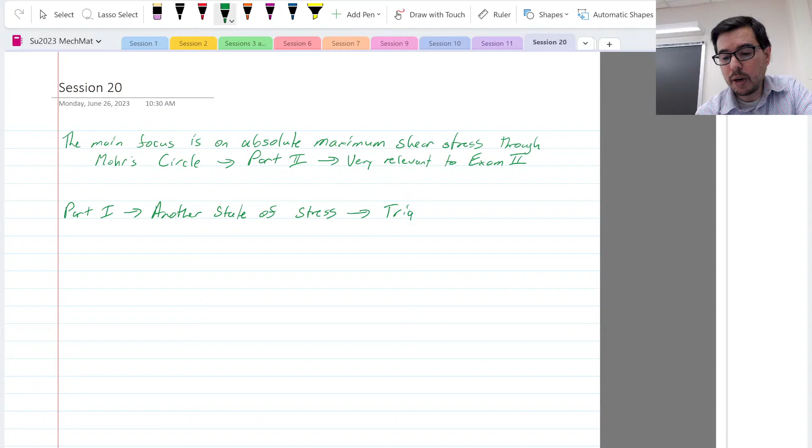But before we get there, I thought it would be interesting to talk a little bit about another state of stress, which is part 1 of this session, and that's called triaxial stress. And the basic idea is that you can have some 3D element, and I can put some stresses on it. Oops. Something like that. And maybe the state of stress looks something like this in terms of a tensor.

Okay, so this is like a general state of stress in 3D, which is not something that we typically focus on studying in this class. But if we have this general state of stress, we can rotate or change orientation such that we find only principal stresses in all three new dimensions, okay? In the new x prime, y prime, z prime, essentially. And we have sigma 1, sigma 2, sigma 3, so all these other terms would be zeros. So there's no shear stress.

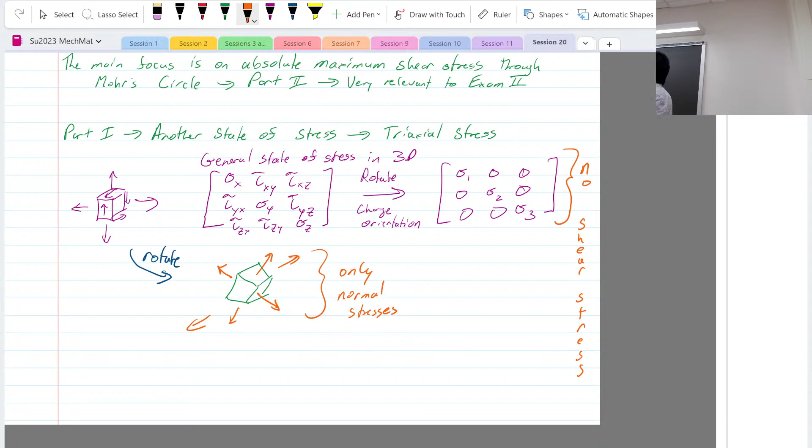Yes? So there's two angles, right, that it's rotating? Yes. So does that mean there's 4 different combinations of the two angles that can control? Yeah, you can get there different ways, yes. I've had to think a little more carefully about this. There's a phrase that says finite rotations do not commute. This is from Professor Baruch in our department in his book on analytical dynamics. So they're not commutative, right?

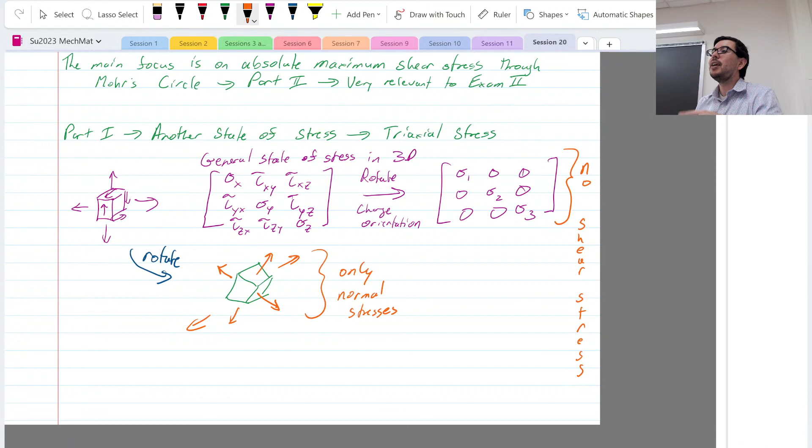So you think, right, we have operations like addition, multiplication. It doesn't matter which one you do first. In this case, it gets a little bit tricky with the rotation. So if you say, I'm going to do a plus 30 degree rotation about this axis and then a minus 30 degree rotation about this axis, if you do the minus 30 before the plus 30, you're not going to get to the same orientation. Okay. Again, beyond the scope. I like the questions. Beyond the scope, right?

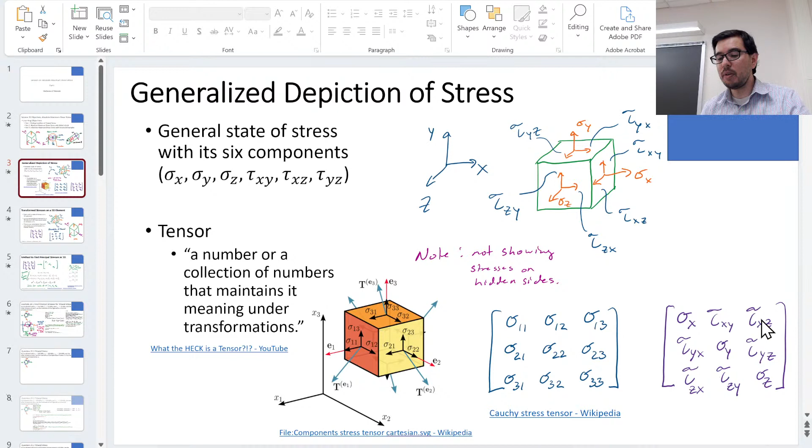So in the notes, what you'll see is that we are attempting to go from some generalized depiction of stress, like you see here, or you see here, right? Because the Cauchy stress tensor is given by just sigmas, but we can also write them out as sigmas and taus. Okay, so we go from that state of stress to some orientation of what's called triaxial stress. So this is a state of triaxial stress when you have only normal principal stresses in 3D.

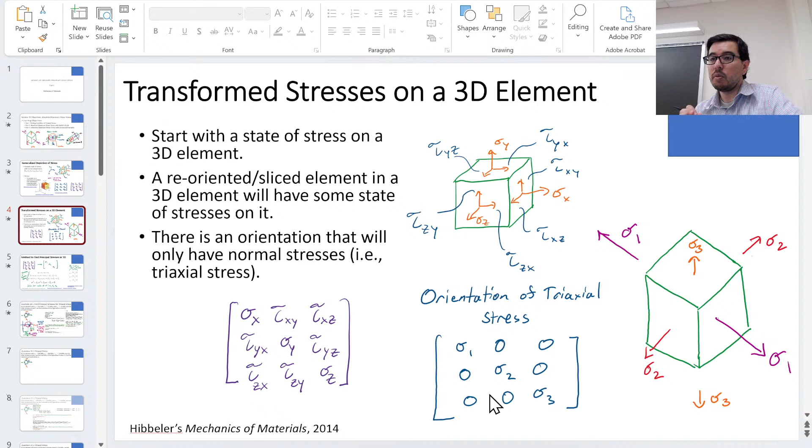Okay? And one method of finding these principal stresses is to set up these invariants, I1, I2, I3, and then solve for the roots sigma 1, sigma 2, sigma 3, as you see here. And this will give you sigma 1, sigma 2, sigma 3. So this is a third order polynomial, and there will be 3 roots that solve this equation with these invariants. If you want to solve it, I highly suggest that you just use the code that I'm giving you, all right?

Now, if we're interested in calculating the maximum in-plane shear stresses, we can do so using sigma 1, sigma 2, sigma 3. So first, what you would have to do is figure out what sigma 1, sigma 2, and sigma 3 are. In other words, we're figuring out what are the principal stresses in 3D.

And similar to what we've done previously, we can use Mohr's circle, or use our understanding, and figure out then what the maximum in-plane shear stresses would be, let's say in the 1-3 plane, in the 2-1 plane, and the 3-2 plane. Again, this is a little bit beyond what you would be expected to do for exam 2, mostly because, compared to what we've been doing, this is a little bit more computationally intensive, numerically intensive.

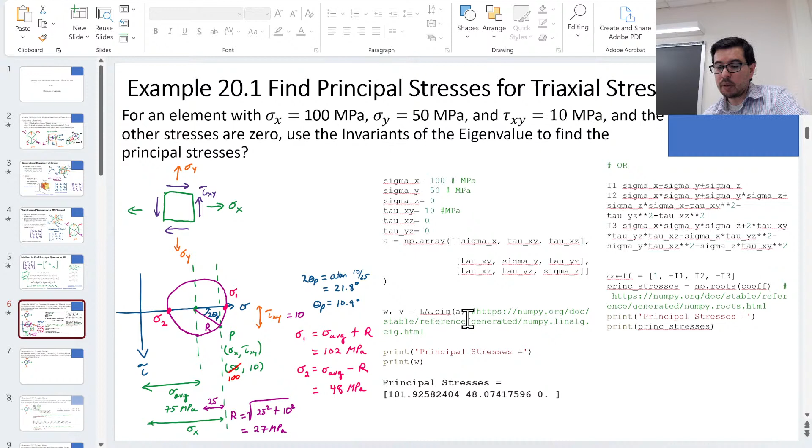Now, another way to do this is to use the eigenvalue solver, which is in here. So, well, actually, this is using the eigenvalue solver, and then this is using the roots technique. Here's what you see: roots, and you see eigenvalues, right? Either way, it will solve the problem for you.

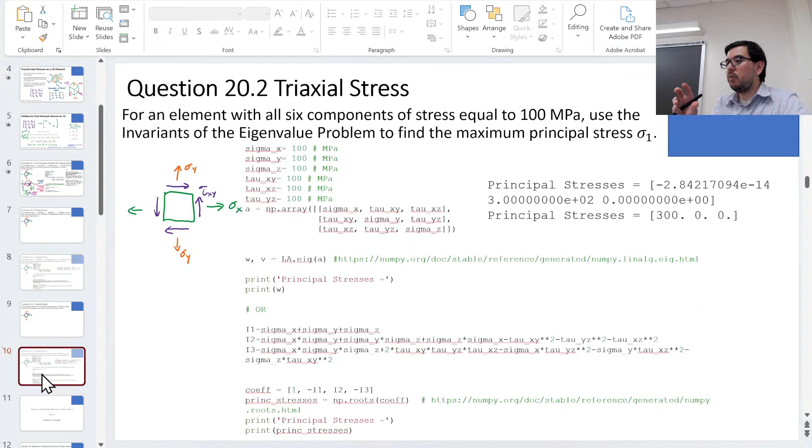Now, this is not going to be on the exam, but I think it's interesting intellectually to be able to understand what we can get if we orient the element differently in 3D. What will definitely be on exam 2 is this section on absolute maximum shear stress. So we just discussed that if you want to take your calculator and have it spit out sigma 1, sigma 2, sigma 3, and then use these in maximum in-plane shear stress formulas, you could do that, all right? What we're going to show, though, is a graphical method.

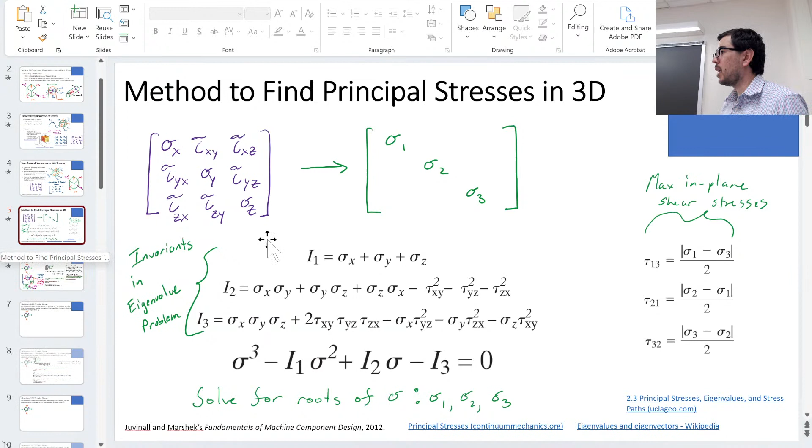This is not really a graphical method. Where is it? Right, this is not really a graphical method. This is a mathematical method that spits out an answer. Absolute maximum shear stresses can be calculated without too much difficulty for our kind of 2.5D problems that we've been doing up to this point.

And why do we want to know what the absolute maximum shear stress is? Any ideas? Based on what we just said about why we want to know maximum normal stresses, why would we want to know absolute maximum shear stress? To see where the material will fail. Right. And what kind of material are we talking about? Not brittle, but the ductile materials, right? And again, it's a little bit unfair because we haven't really gone through failure criteria yet. But your steels, your aluminums, these ductile materials, these are the ones that fail because of shear.

And so we were saying before, oh, I can figure out what the maximum in-plane shear stress is, and that could be important to determining why a material fails. But it turns out, even with a 2.5D problem, the largest shear stress may not be in the plane that we've been discussing. And so that means that we would like to figure it out, because we care about failure, and we will care about failure more in the future.

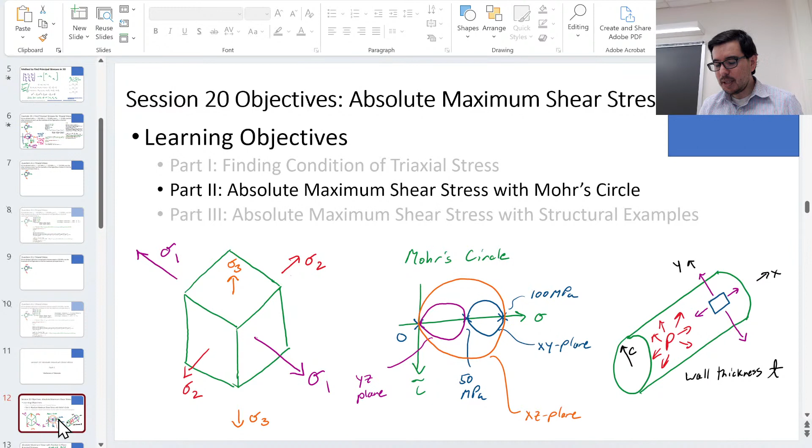So you can go through the video. There are 2 cases that are important that you want to think about. And those cases are where you have principal stresses that are both positive. All right, so the video does a better job than I can do right now. But what you'll see here is you start with a positive state, right? So sigma 1, sigma 2 are in tension.

I guess maybe we should back up and say, look, what we've done is we've found the principal stresses in 2D, in a plane, right? So that means that if I gave you a sigma x, a sigma y, and a tau xy, that's what plane stress is for us. So 3 parameters, sigma x, sigma y, tau xy. You make your Mohr circle, and I highly suggest you be able to do this. I give you sigma x, sigma y, tau xy, you make your Mohr circle, and then you figure out what sigma 1 and sigma 2 are.

If sigma 1 and sigma 2 are both positive, in other words, this state where they're both coming out of the element, two tensile stresses, two normal tensile stresses, then let's say that's this Mohr circle right here. All right, so maybe I will go ahead and do this. I don't think I can outdo myself, but let's point this out. So we start with a sigma x, sigma y, tau xy.

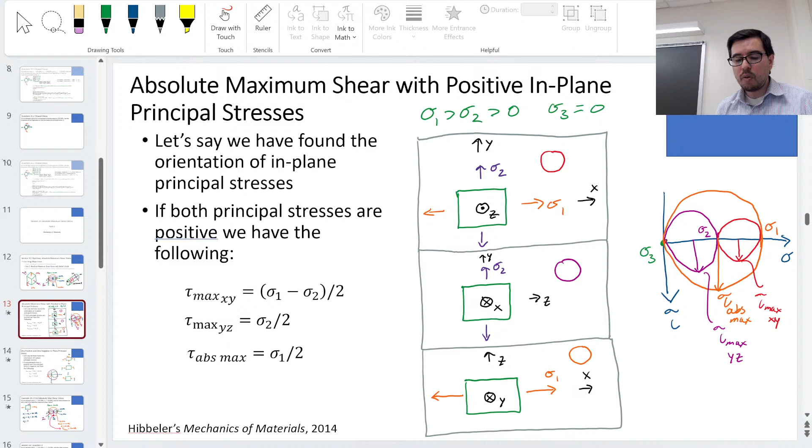But what we're saying is there exists another plane, this xz plane, where we have a larger shear stress, a larger radius of the Mohr circle. And so this one we can designate as the absolute maximum shear stress. And for a particular criterion, a ductile material could fail because of this absolute maximum shear stress.

Okay, question, yes? Isn't that always gonna make a square from the edge of the circle? I'm sorry, what do you mean by a square? Like it's from sigma 3 to the center, which is the radius, and then from the center down to the other edge, which is the radius.

Okay, yeah. So we would have a sigma 1,3 average, just like we've done with other Mohr circles. The middle of this is sigma 1,3 average. And yes, R is going to be from the sigma 1,3 average to sigma 3, to the absolute max, to sigma 1.

Okay, now, there's the other case. This was the case where both sigma 1 and sigma 2 are greater than 0. There's another case where you get a sigma 1 and a sigma 2 and they're not both greater than 0. In this case, for example, sigma 2 is less than 0.

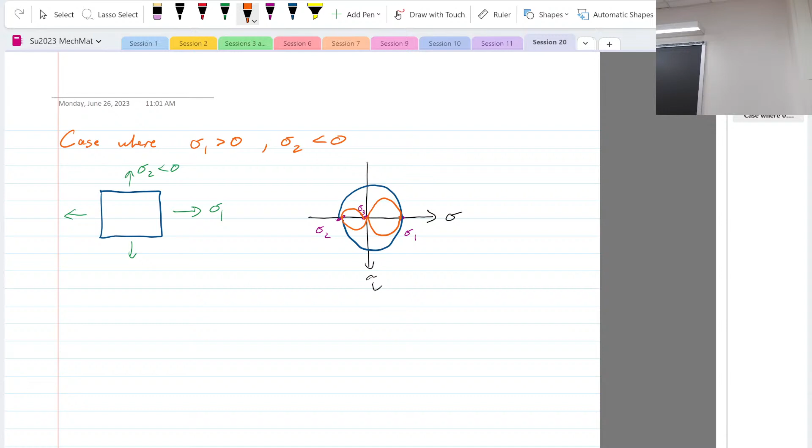George, which one of these is going to give us the maximum shear stress? The biggest one. All right, 2 for 2. The biggest one is the one that gives us the maximum. So in this case, when sigma 1 is greater than 0 and sigma 2 is less than 0, what we had as the maximum in-plane shear stress is actually the same as the absolute maximum shear stress.

So in this case, the in-plane, and we're talking about the 1-2 plane, max shear stress is the same as the absolute maximum shear stress. Okay.

So that's the whole thing. So what do you get to do? You get to take what we've done with our Mohr circles in the past and add a sigma 3 at the origin, draw 2 more circles, and then figure out which is the biggest.

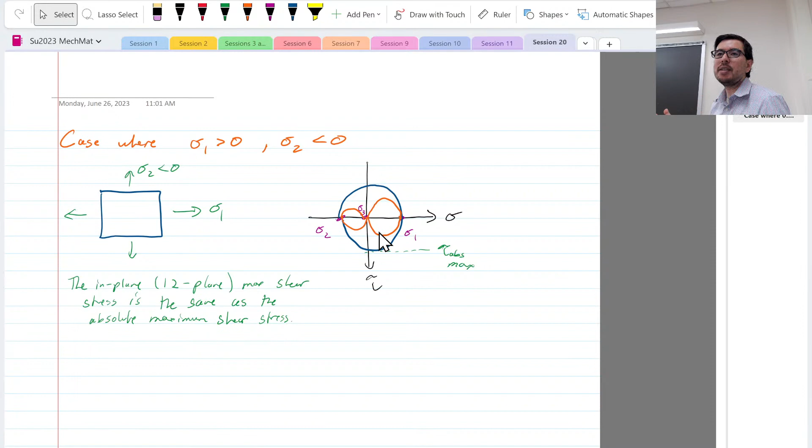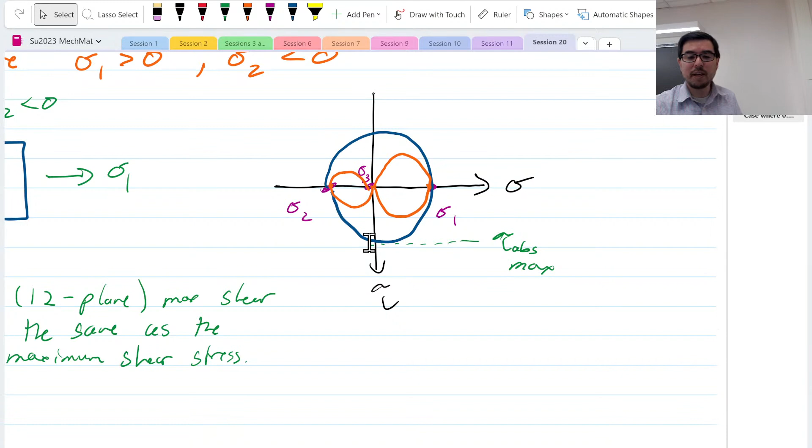Yes? Is the right circle supposed to be bigger? Yes, it is. Because I drew sigma 1, I tried to make sigma 1, like this diameter is slightly bigger than the sigma 2, sigma 3. And how is the radius? Why is that though? That's because I picked. That's what I picked. You could have sigma 1 less.

So I could take the absolute value of sigma 2, and if the absolute value of sigma 2 is greater than sigma 1, right? This is just arbitrary. Oh, so, okay, I could have easily written it like this. Could they be the same if sigma 1 and sigma 2, their magnitudes were just equal? Yeah, yeah.

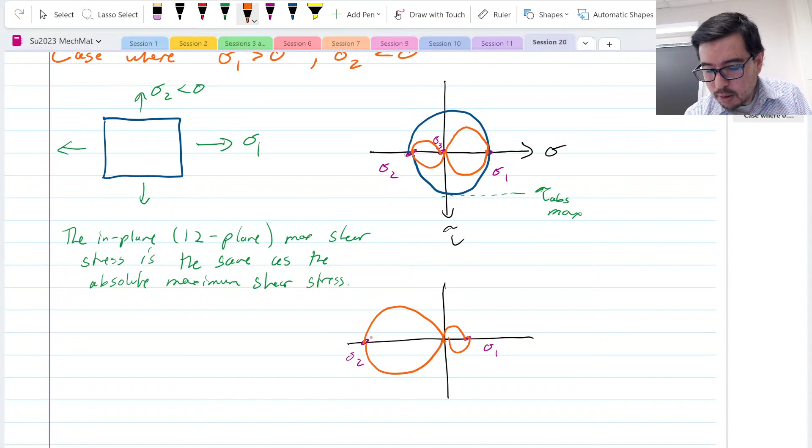Right, and what would be cool about that if they're equal? This is a good point, Owen. So this again, I draw my Mohr circles, right? Little bitty one, and the big one is the dominant one. But what happens? That's almost worth another page. What happens when sigma 1 is equal to minus sigma 2?

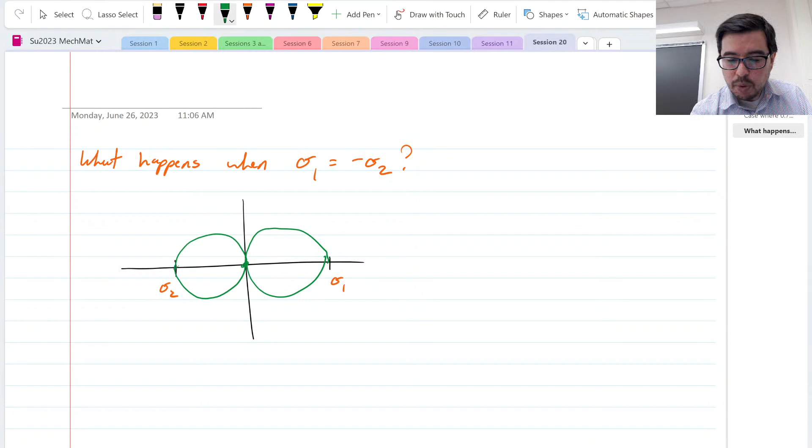In that particular scenario, we'll call this one sigma 1. I'm trying to make it somewhat symmetric. Look, this sigma 3 is again at the middle. I didn't quite do perfect, okay? But we can say that the sigma 1, 2 average is at the origin. So we'll say this is at the origin or equal to sigma 3, or we'll say this is the sigma 1, 2 average right in there.

What is cool about this? Something very cool. This is in a state of pure shear, right? We have a state of pure shear because when we get to here and here, the tau absolute max, there's no normal stresses. At this state, pure shear without normal stresses. Okay, and that's an important case.

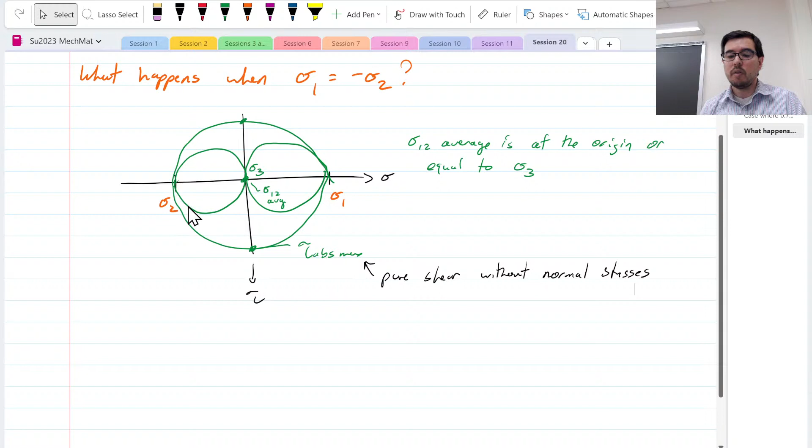So we can think of this, if you want, as a rod or a shaft being twisted. That would be equivalent to that, and we could figure out what the principal stresses are, where sigma 1 is positive and sigma 2 is negative. Right. So in the state of pure shear, if we said we had a

T, okay, and I took an element here on the surface, so this is a little bit hard to see. Let me draw the T a little bit differently. I think that's more clear, right? We're as clear as mud. Okay, and then I've got that element.

So the way I draw these, this is on the top surface. I say, okay, this is twisting this way. Then I visualize the deformation, and so this is pulling this surface this way. That means that this surface has to be going the opposite direction. And in order for these to be in equilibrium, I've got to draw them like that. So this shear stress is tau absolute max in pure shear for this particular case.

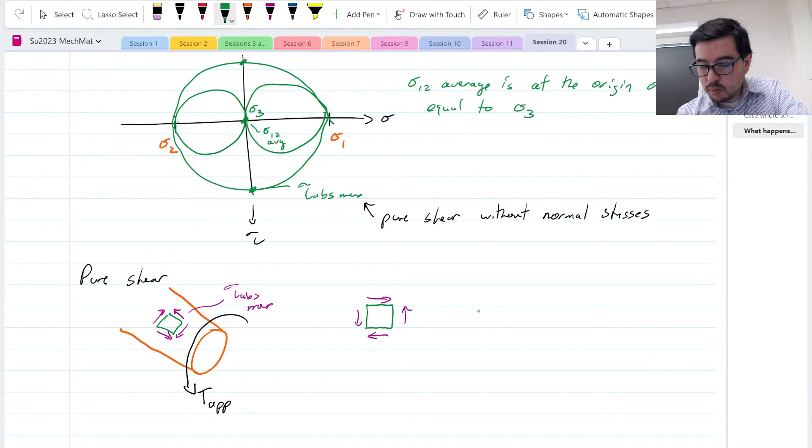And what does this mean? That means that if I rotate 45 degrees, remember, 90 degrees rotation on Mohr circle is a 45 degree rotation on a regular element, because we have a 2 theta. So I started with this element. Let's just do it this way. And I rotate 45 degrees. That's not quite 45. Rotate 45 degrees.

My new sigma 1, this is 45-degree rotation, will end up being equal to the tau absolute max, right? But look, if I go from here to here, sigma 1 is positive, but then the corresponding sigma 2, it's negative. So that will be in compression. And this is compression.

So technically, if I drew it the other way, I could say it's coming out and sigma 2 is negative, or I could just say sigma 2 is positive here and it's in compression. Or I could say the magnitude. So this is a very interesting case that you just pointed out, Owen. And one you should be familiar with.

That's pretty much a long overview of what's in the videos, and hopefully will help as you go about working on the problems. All right, great. So we'll give you some time to think and watch and work.

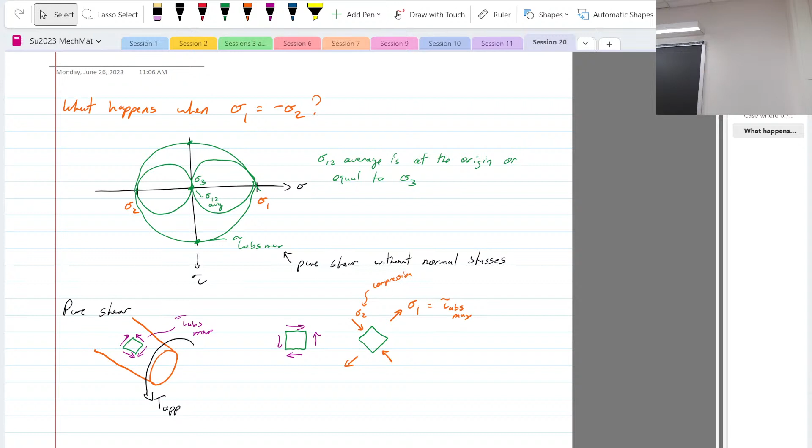Okay, let's point this out. I think this is worth pointing out because it's confusing. Because the line should be straight, right? Between sigma x and sigma y. Like an L. Yeah. All right, folks, this is fun stuff. So Carlos, you're saying, what if we have a sigma x equal to some value, we'll say it's greater than 0. And we have a tau xy, we'll also say it's greater than 0. And we have a sigma y equal to 0. Does this make sense? Okay, so if that's the case, when we draw the Mohr circle,

what's going to happen here? Well, we gotta draw it. The first thing is you figure out where the center is. The center we can put right here, for example. And this is gonna be the average. And what is sigma average? Well, it's just sigma x divided by 2, okay? And then the next thing is we say, sigma x is greater than 0 and tau xy is greater than 0. Where is that going to be? We know it's going to be in the 4th quadrant, if we're thinking about quadrants. It's not exactly, but it's like the 4th quadrant of the green and the black.

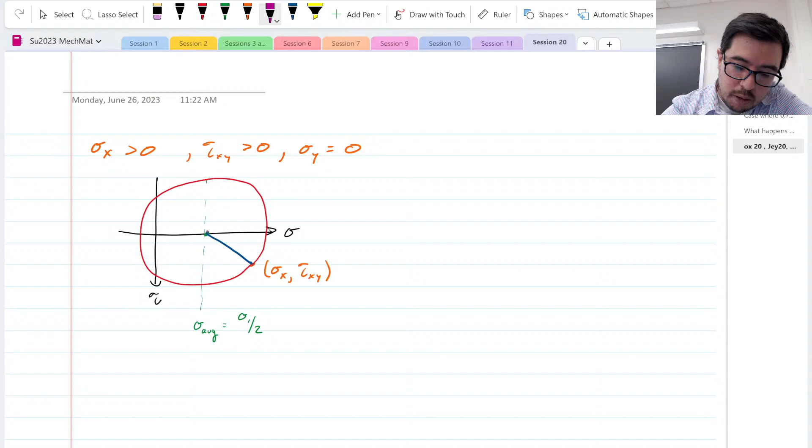Okay, this point over here, that's got to be the sigma y, negative tau xy. Okay? Usually we pick sigma x when we draw Mohr's circle, but it needs to line up with the sigma y as well.

And on the opposite side, because think about it this way. What is the angle of rotation between sigma x and sigma y in a plane? 90 degrees, right? What is it on Mohr's circle? So it's 180. So where does 180 put you? Over here, right? So that's why on Mohr's circle, the sigma x and the sigma y are 180 degrees from each other, and they form a diameter through the Mohr's circle, okay?

And remember we did that problem when we rotated about the x, right, 90 degrees? It's similar, right? What happened with the tau? Remember the tau flipped from positive to negative. Same thing happens here. Okay, so that's how you handle that.

So if sigma y comes out to be 0, there's a good chance that your sigma 2 is going to be less than 0, because it's going to pop out over here. This is the sigma average, which is dictating here, that's the sigma x plus the sigma y divided by 2. Or it's just sigma x over 2.

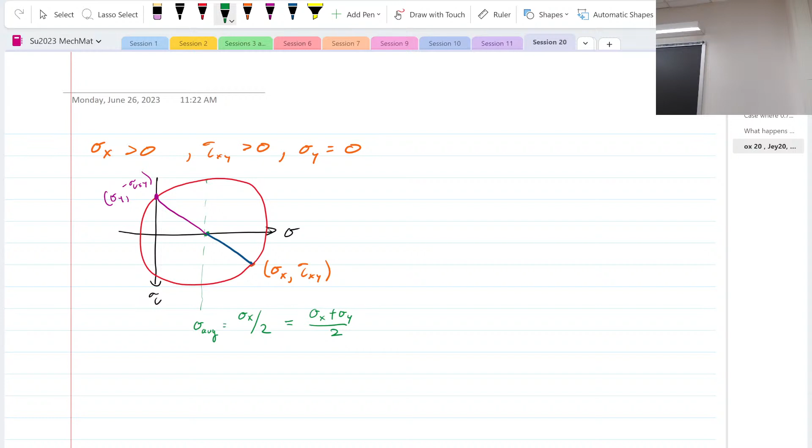Okay, so there's a question. I think the question is: is there shear stress in a pressurized, thin-walled, spherical vessel? That's the question, right?

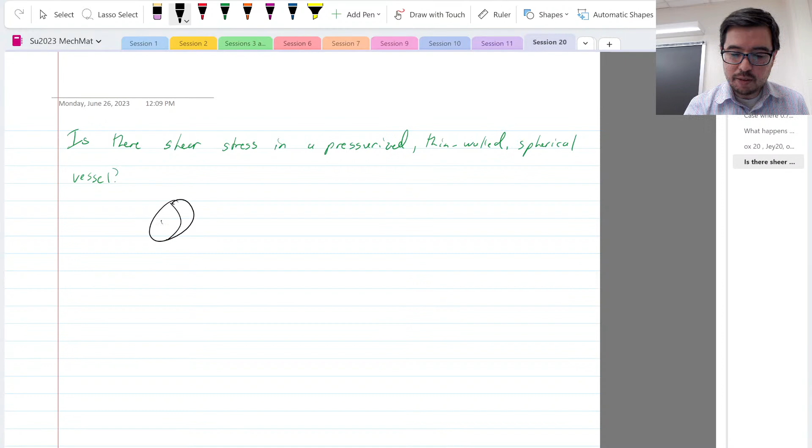Is that thunder? Yeah, it was lightning when I was driving down. It was really bad rain, I drove through it, and then it's nice and sunny on the way here. The water was so high, it's really bad. It was on 22 where I was, and I was in my mom's Lexus, she has an SUV. If I was in my Accord, my engine would have got flooded. I was driving by so many cars that were just submerged in the water, and I was like thank God. I just took my mom's car out because I just felt like it.

Is that by the intersection by the Watchung Mountains with the massive hill and a valley? I think in the past people have actually died at that intersection from flash floods. Wait, was this yesterday? Yeah, I'm driving, it's normal, it just starts pouring rain. I can't see. I look outside and the water level's getting bigger and bigger. The rain was hitting the windshield hard. It was actually insane.

Okay, back to spherical pressure vessel. I guess it's impossible to not have been reading the news about a cylindrical, thin-walled vessel that had a catastrophic implosion. That problem is very different than this problem, because we have internal pressure. In that problem, you could crank up the internal pressure to equilibrate with the hydrostatic pressure, but then you are going to hurt people. So it needs to be able to have a lower pressure inside than outside. One of the nice things about these problems is that we're not susceptible to buckling. We don't really cover buckling in this class, although it's in Hibbeler's book, but we won't get to it.

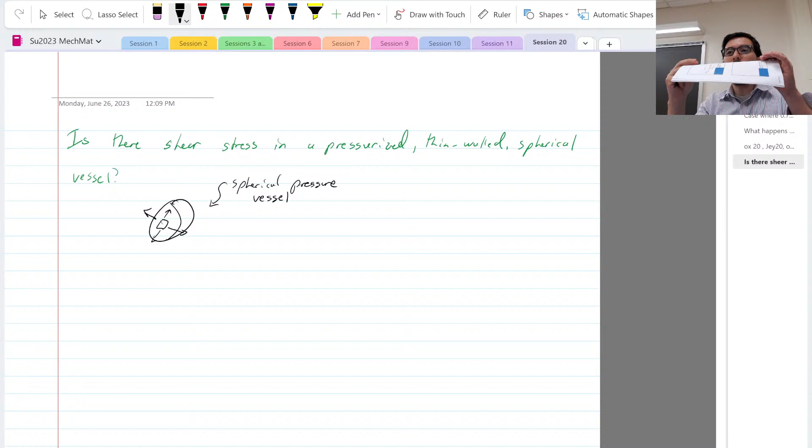But by having a vessel that's in tension and pressure, we don't have the possibility of buckling, where I crunch it like this. So we'll see what the investigation reveals.

But from what they're saying, they're probably delaminated pieces, because from what I read, it was a carbon fiber composite shell. That and titanium are two entirely different materials. And so if there's delamination, that can greatly weaken things, right? But you've got a problem where the larger and the thinner you make something like that, the more susceptible it is to buckling. All right. Anyway, that's a completely different problem.

But in our problem, we have a spherical pressure vessel, and in the wall, and that's a really poorly drawn one, you're going to have a sigma, we call it sigma 2. Different people call it different things, but this is because it's not sigma 1. Sigma 1 is the hoop stress, PR over T. This is PR over 2T. So sigma 2 is equal to PR over 2T.

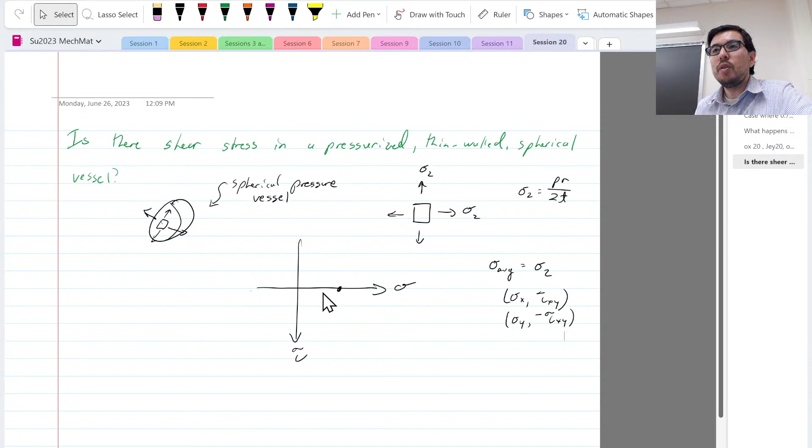So I can draw this element, really bad handwriting, all with sigma 2s. I can draw this element, all with sigma 2s. It doesn't matter. Any rotation I do about a normal to that surface is going to give exactly the same state of stress. So the shear stress for any rotation is going to be 0, and it's just a point on the Mohr circle. If you look at exam 2 from the spring, there was a problem that had the same kind of result.

Why is sigma average just equal to sigma 2? Well, look, sigma 2 and sigma 2 are the same, right? So sigma average is just sigma 2 plus sigma 2 divided by 2. So it's just sigma 2. Good, I'm glad you asked that question. Does that help a little bit? I was trying to see how it would be like a dot. It's a dot.

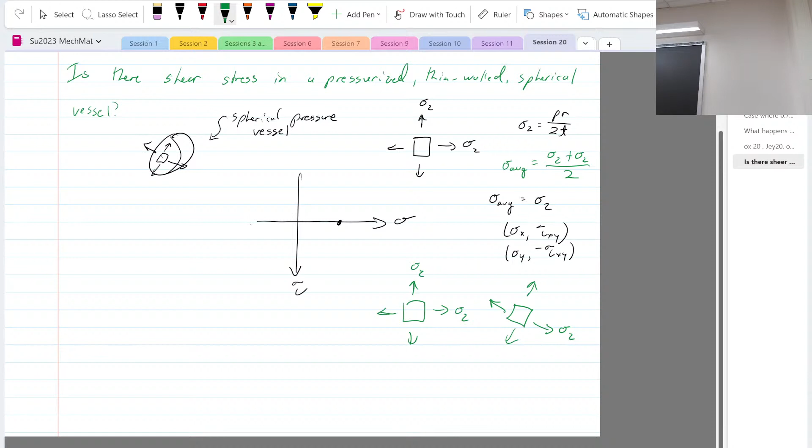What's my opinion on what? What's the elastic modulus of carbon fiber? Does that have an effect? Yes, it can have an effect. The yield strength is really what they're most concerned about, but yes, the elastic modulus can have an effect as well. For carbon fiber, the yield strength can be quite high. They use it in race cars and also planes.

It's usually carbon fiber with an epoxy. We do some stuff with this, but the reason it's so wonderful for aerospace is it's light. Its strength to mass ratio is amazing. So you could have carbon fiber, you can have glass fiber as well. They're fiber reinforced. Doesn't that have the strength? Yeah, and stiffness. It does end up having a very high elastic modulus for its mass as well.

Right. So the tensile strength. 3 gigapascals. All right. It's like, right, we usually think in terms of hundreds of megapascals. It's like what, 20 times less than steel? Well, it says 10 times more than mild steel, right?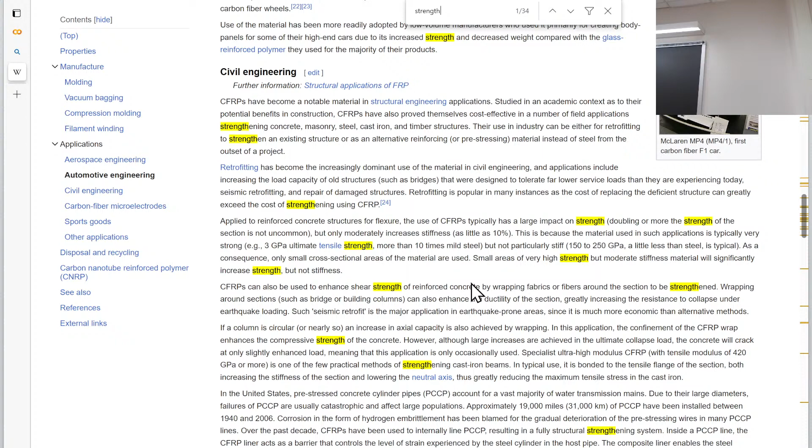Is that on the right or left side of the circle? Okay, so when you're doing Mohr's circle, what you want to make sure happens is you draw these combinations: sigma x, tau xy, and sigma y, minus tau xy. So it depends, right? But typically,

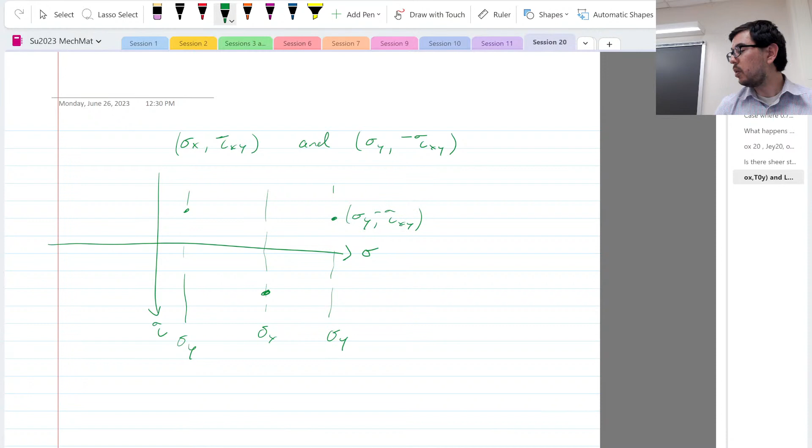not always, if both of these are positive, the way we use our nomenclature, this one, wherever sigma y is, it could be over here, or it could be over here, I don't know which one it's gonna be, but it's gonna be opposite. Gotcha, that makes sense. It could be one of those. Okay, good, thank you for asking, Tyler.

Tomorrow will be a new topic, plane strain, not on the exam. And if you have questions on this assignment, we go back all the way to beams, really. We ended right before exam 1 on torsion, so beams on, there's a lot of material for exam 2.